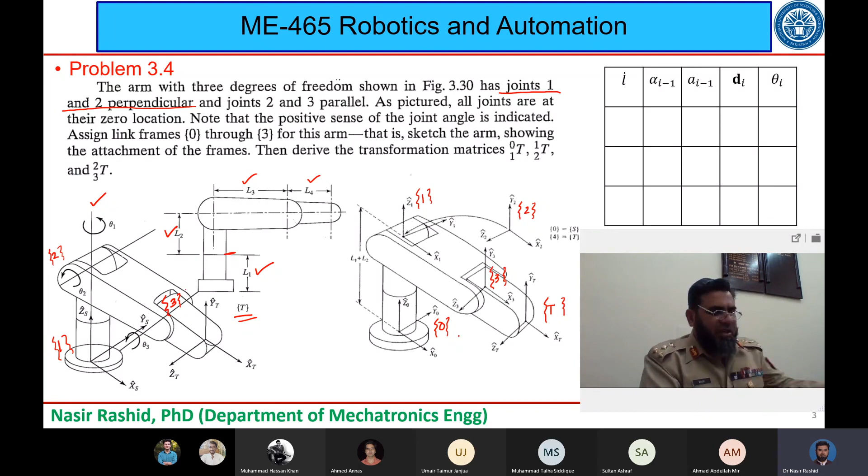We have shown this as zero frame here, and we have shown the tool frame as frame number 4. So we can write down here that this is frame number 4.

Alright, so we have now 4 frames attached, and then we can just write it down. Since we have the tool frame here, we may add this tool frame into our DH table, and if we do not add this, it will not make any difference. Reason being that we are only interested in the joint parameters. So this link length, which is given by L4, will not come into action, because we would only be interested in the 1 to 0 transformation, then 2 to 1 transformation, and 3 to 2 transformation.

So let me just write down these parameters. Let us say this is joint number 1, joint number 2, and joint number 3. By looking at these frames and their orientation, we can see that frame number 0 and frame number 1, there is a difference between them, L1 plus L2. And what is the alpha angle between them? Since both the Z's are aligned, the alpha angle is 0.

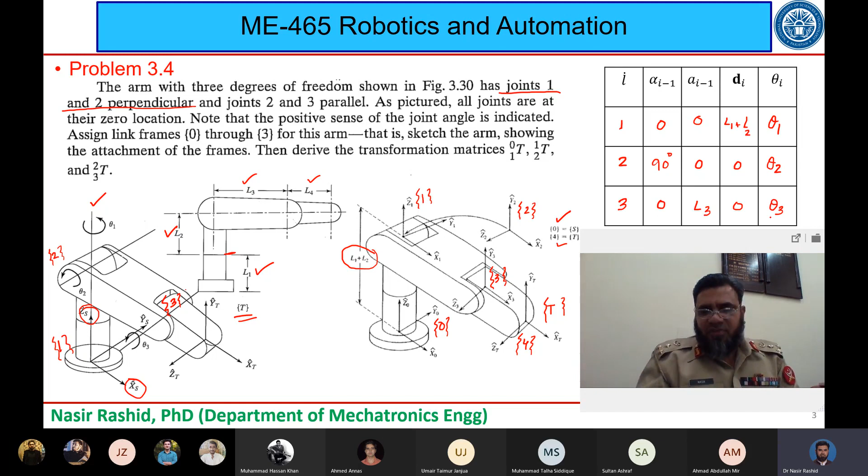So if I go on to the next slide, let me just write these down here again. We had 1, 2 and 3, and we had 0, 90 and 0. We had 0, 0 and L3. We had an offset of L1 plus L2 here, then we had 0, 0. We had theta 1, theta 2 and theta 3. So these are the link parameters which we came across.

So now, you know that this is the criteria to write down the transformation matrix between any two joints. This is going to give me T1 to 0. This is going to give me T2 to 1. And this is going to give me T3 to 2.

So if I write these things down here, T0 to 1 is going to be cos theta 1, minus sine theta 1, 0, 0. What I am doing here is repeating this time and again just to give you a reinforcement of what I am considering. I am putting the values here, and in turn I am getting this here.

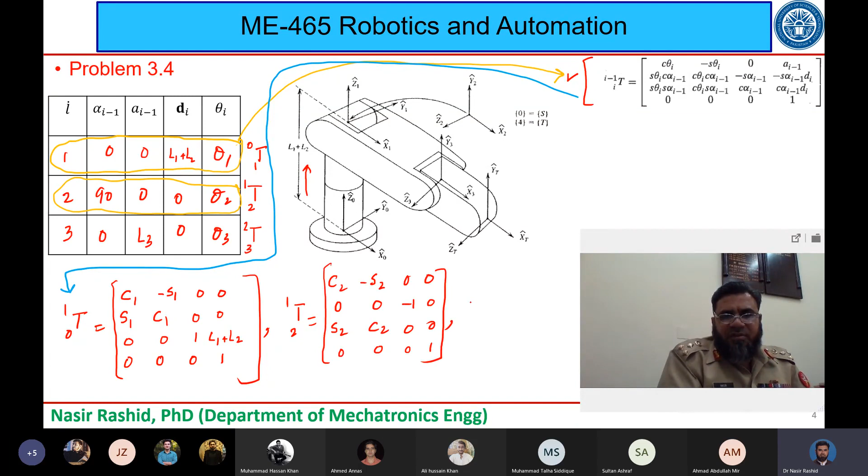So this is the second transformation matrix, and the third transformation matrix, which is between 3 and 2, will be given by this row, and it can be written as cos theta 3, minus sin theta 3.

Let me just shift it a little like this. So cos theta 3, minus sin theta 3, then 0, 0, and now the L3. You know that this was L3 between 2 and 3, and it is in the x direction, so we will have L3 here, then sin theta 3, cos theta 3, 0, 0, then 0, 0, 1, 0, and finally 0, 0, 0 and 1.

So these are the three matrices which we were required to find out. And now if you want, then you can know the full transformation, which can be given by the equation T 0 to 1, sorry, let me just correct it. So we can have T3 with respect to 0, and this can be given by T 1 to 0.

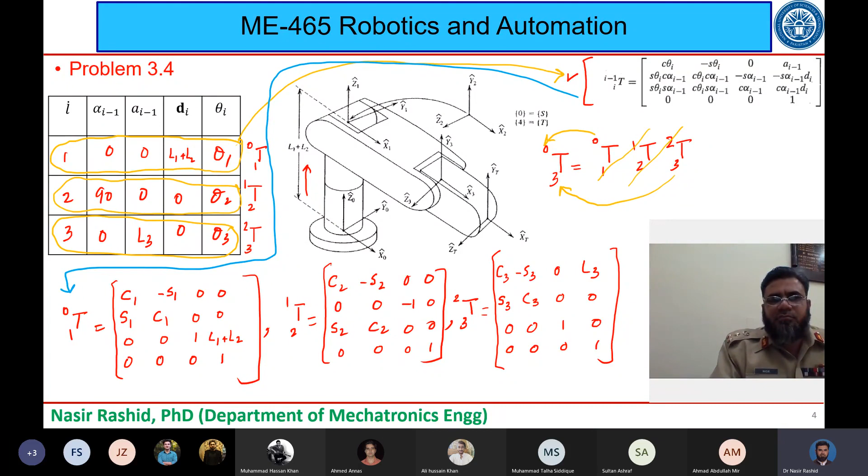People are practicing at home as well, because the practice will make you perfect to calculate all this.

So let us talk about another problem, which is problem number 3.8, and this is also taken from your book. So the figure given, which is 3.31, gives the location of the tool. So we have the tool frame here. So the location of the tool, which is given by transformation of T with respect to W, the wrist, is given by this transformation. But this is not accurately known.

So using force control, the robot feels around with the tool tip until it inserts into the socket or goal at location, which is given by a transformation GS. This is frame G, and this is station frame. I think you remember that this is what we studied yesterday, in which we defined certain frames which included the base frame, the wrist frame, the tool frame, the station frame, and the goal frame.

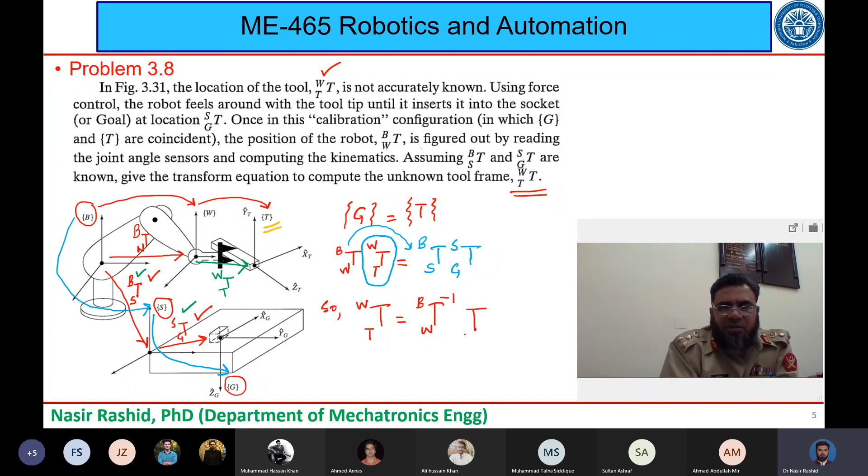So we would be able to come out with a solution of a transformation between T to W, and when it comes onto this side, this becomes T inverse of wrist with respect to base, then transformation of S with respect to base and the transformation of goal with respect to station. So this is the equation which we get.

And we know the inverse of this is actually going to give me the transformation of base with respect to W. Then I'm going to put this one as it is here, and I'm going to put GS as it is here, and this is going to be equal to transformation of tool with respect to wrist.

So now let's see if we have made it correctly. Okay, so S cancels with S, B cancels with B, and what mistake have I done? No, I have not done any mistake. In fact, this G is equal to T. So it means that we have now brought W here, and this G comes here, and we know why G is equal to T. So there is no mistake. G is equal to T. We started off with this condition.

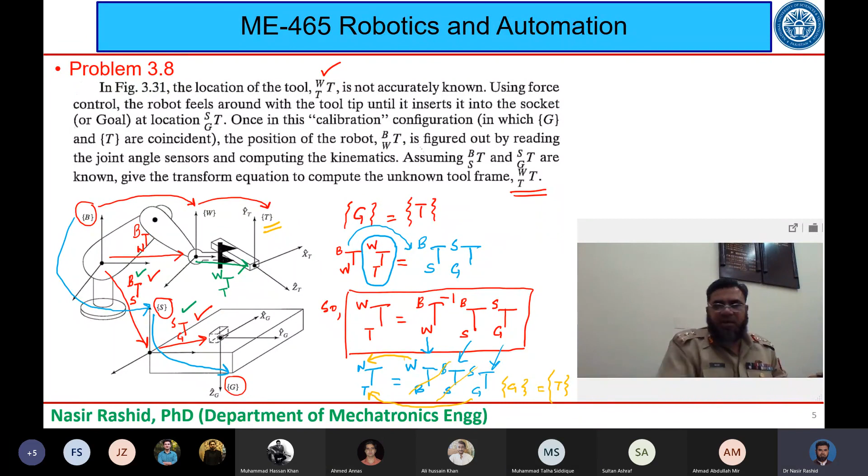Quickly we are going to solve two more questions just to give you an idea. So let me just move forward, and I'm now going to solve this question for you, which is figure 3.33. So this is figure 3.33, which gives you a schematic of a wrist which has three intersecting axes. So all these axes are intersecting here at this point.

We have studied the wrist in which all the three joints are at right angles to each other. But in this particular case, one of the axes is not at right angle to the other two. So these are not orthogonal axes. So let me just assign the frames to all these.

So let me just assign the frames. So if this is Z4 — I am defining it as 4 because theta 4 is given here — this is Z4, and this is Y4, and X would be going into the board.

So let me just assign a frame here also like this, which is Z5, and we will have again a Y5 here. This is actually Y4, and again if I curl my finger from Z to Y, X would be going into the board. And then we have the third like this, which is Z6, and its Y would be like this.

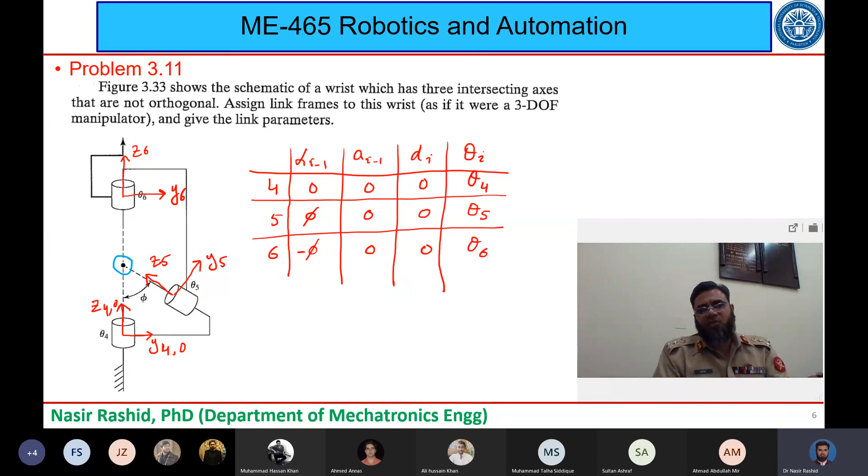So these are the DH parameters which I have shown. Let me give you one more example so that there is some more reinforcement for you. This is another link which is RPR. We have a revolute joint here, a prismatic joint here, and a revolute joint here. So let us first assign the

frames to this. Since it is rotating at an angle theta, Z1 would be coming out. So let me make X1 here, Y1 here, and Z is coming out. Since this is frame number 1, I have assigned this frame at joint number 1. This is a prismatic joint, and it will move either in this direction or this direction. I assume it is moving in this direction, so I take this as Z2, and correspondingly X2 in this direction. This is a prismatic joint, please remember this.

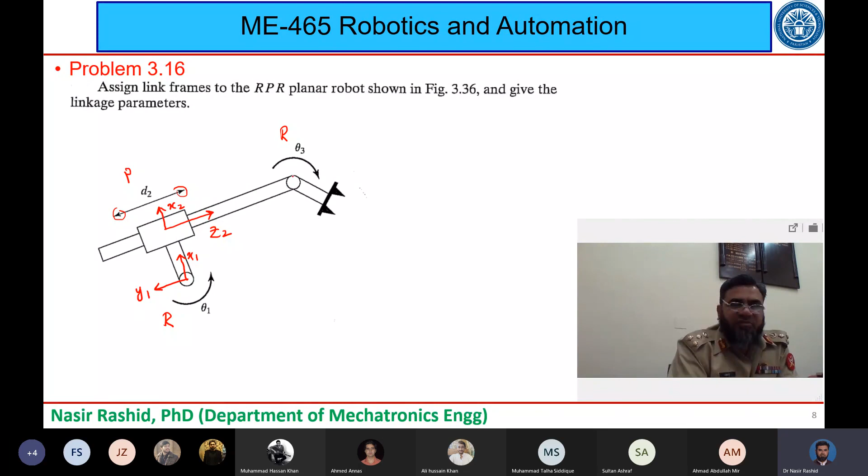And then we have a third joint, which is a revolute joint, joint number 3. Its direction of rotation is like this, theta 3. So Z would be going into the board in this case, and we will have X3 here.

And since X and Y has to give us Y, X and Y has to give us Z, and Z is going into the board. So we will have Y3 here. Okay. So what happens if at all we give a wrong rotation here? What happens is that in the DH table we will have a negative sign. If we give a wrong rotation here, we will have a negative sign in the DH table. So that will actually give you an idea of what happens if we give a wrong rotation here.

Actually, now since there is a movement involved in this P, there is going to be a link length involved between these two, which is given by... this is not the link length, this is actually the offset involved between these two. And this will be given by, let me just give it L2, and there is an offset between these two also, so this can be given by L1.